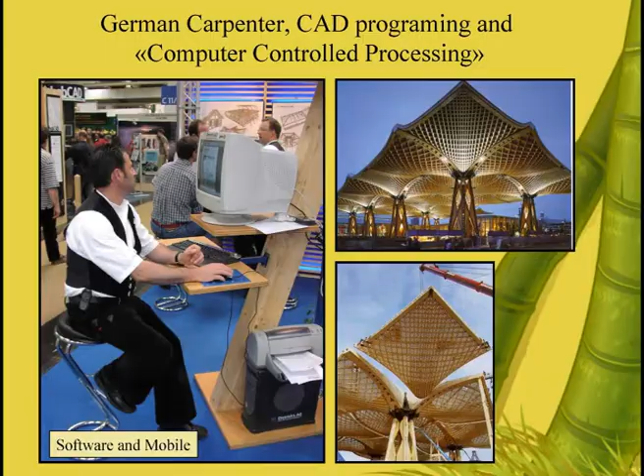So I see you understand English. Okay, so obviously it is good to have practice.

I learned with Simón Vélez, and Simón Vélez in 1999 was building this building - it was a prototype scaled model for the World Exposition in Hanover. So I worked with him. I also did work before, but I learned a lot. For example, this building was tested.

This was engineered and tested in a prototype. They did cables from here to here and from here to here. They put a lot of load, and with the total station they were checking all the deformations, and later they put the AutoCAD design into the computer to calculate with SAP 2000 and to measure all the deformations and get conclusions about the engineering capacity of bamboo.

We know bamboo has a very big tensile strength, similar to steel, but the problem is in the joinery. Later we can talk a little bit about being honest and showing also the bad parts of a construction, because only if we put our fingers in the wounds can we really learn. So making things, building, is a very dangerous job, because you are going into new terrain and you are making errors, or the workers are making errors, and you are responsible - you as an architect, you are responsible. So you have to learn first from the masters and then do your own job, but also be able to check critically what you have done wrong. But at the very end, you must put engineers to do the testing and verify if your SAP 2000 calculations are correct. The problem is not the bamboo, the problem is the joinery.

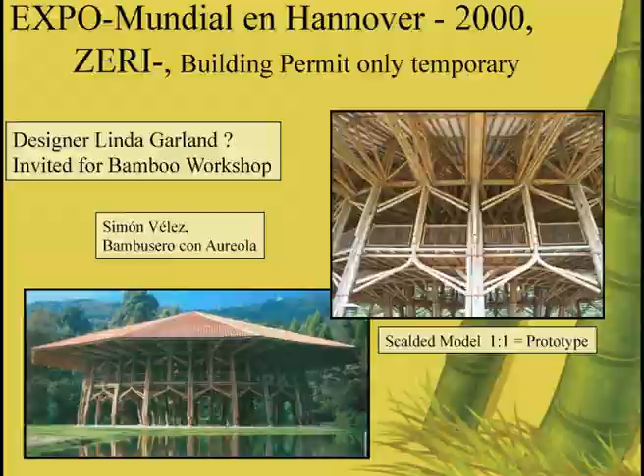Linda Garland, I think, is also very important. I met Andri at Linda Garland's, but I think you gave the introduction already. So in Bali you have now these types of buildings. Actually, I was in 2005 giving a workshop at Linda Garland's place. I think you were there, and also John Hardy was there. He got very fascinated about bamboo. He did some traditional bamboo housing before, but now he started to do these crazy things. And I think nowadays the world is looking to Indonesia and saying, wow, Indonesia is making wonderful bamboo constructions. And if I see your house, yeah, it's true.

Yeah, it's beautiful. You have a big potential. There is a big potential, only maybe 1% of the market. But there is potential for guys like Andrea to go into the world, and for you too, but you have a fixed job. There is potential for all of you if you become a little bit practiced, and also visionary. There will be jobs, hotels, social work is always good for beginning, but you can't survive too much time on social work, yeah? Unless you become a UN consultant or something.

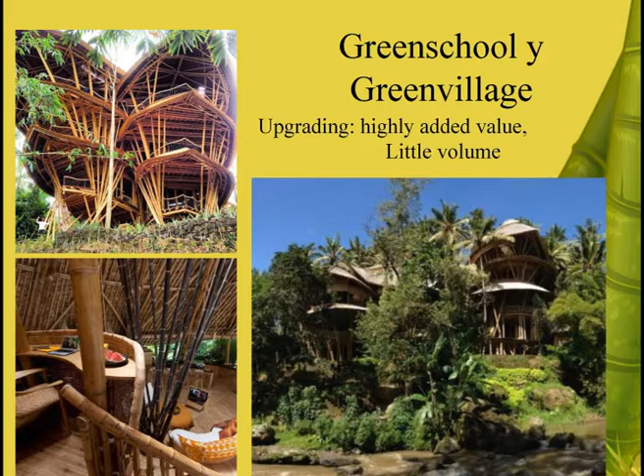That's good. So let's go on.

There is also a second business line, export of poles. Indonesia is exporting a lot of bamboo hitam, a lot of bamboo petung, and also some other species, I don't know. But Christoph Tönges is buying 2 or 3 containers per year from Java. So there are companies in Germany that buy from Vietnam, from China, from Colombia, from Indonesia, from Africa. So inside Germany you can probably buy more species of bamboo, already preserved, dry, cleaned, but you pay $20 a piece.

So I was selling 8,000 bamboo poles, perfectly graded, 12 centimeters on the bottom, 11 centimeters on the top, plus or minus 5 millimeters. I sent 8,000 poles to make this parking lot. This was 12 years ago, and the bamboo is a little bit gray now. Then they ordered new bamboo, and I think they will replace this bamboo, but they made a second parking lot. So in the city of Leipzig there is a 4-story parking lot at the zoo made from Colombian bamboo.

The structure is steel, but that's so the cars don't fall out and the children that walk there don't jump out. We had to cover this. Initially they thought in wood, but as it was the zoo, they thought, okay, if we have the zoo with all these tropical animals, why not making the parking lot also a little bit tropical looking? I saw so much green...

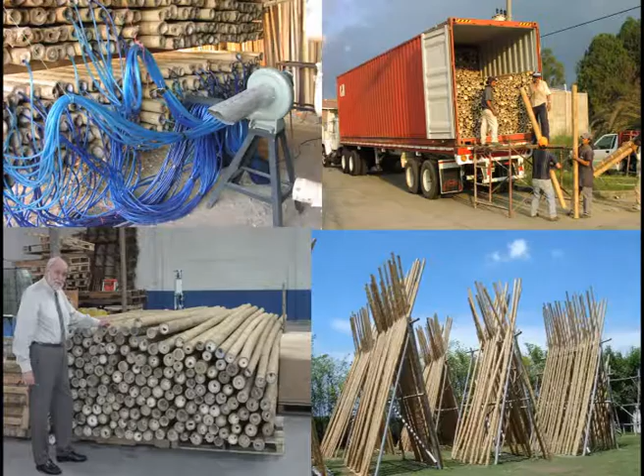The main problem was the selection process and the drying. I had to deliver very fast, and the bamboo was preserved. So you make a hole through it, put it in a tank, and then it comes out with 150% humidity. So you must dry it. The drying was done like this, so it becomes nice and yellow, but after 2 or 3 weeks here you must put it in shadow. Like here it is in shadow, and there's always a stick between each line, so the air is flowing through it. But it was still too slow—even though Colombia is a tropical country, it was hot, but not hot enough.

So I did this invention: I blow air through the hole. The bamboo is actually drying from inside out, crack-free. Because if it dries from the outside, the inside still has water, and the outside is drying, so it cracks. But if you shrink the middle first, the outside will be without crack. So I gave this invention to the world—you can copy it, it's not patented, because I want bamboo to be successful. Anyway, it would have cost $10,000 to make a patent on that, and I don't have it.

But this is the way to do export in bamboo. So there is business, very occasional. The problem is Colombia—$500 a month for one worker is 3 times more expensive than Indonesia. But if you copy this system, Indonesia has a big potential for bamboo export.

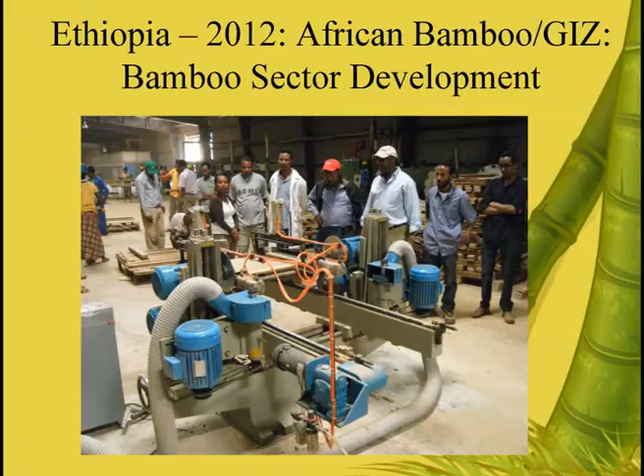Also in Timor-Leste, for example, but not here in Indonesia. So what we are doing is this type of bamboo flooring. We cut, split, and make bamboo flooring. Another type of bamboo flooring is what you have in hand. You crush the bamboo and glue it together so it really looks like wood. There's not much difference between this and the traditional look of wood. The specific density is more or less 1 ton per cubic meter, or between 0.9 and 1.1, depending on the machinery. The trick is to make splits, and each kampong can have a collection center where it is prefabricated in splits.

Then you send it to the factory, like Indo Bamboo or this other factory, Bambulogi. So you can make blocks, and every carpenter, every furniture maker can use this to make furniture. Before, Java was very famous for the teak industry. You made thousands of teak chairs for the whole world. The logistics, the factory, the machinery is all there, but there is no more raw material.

I think this, together with the 1,000 village program like what Arif is promoting now, is the future of Java, and maybe Sumatra and Borneo.

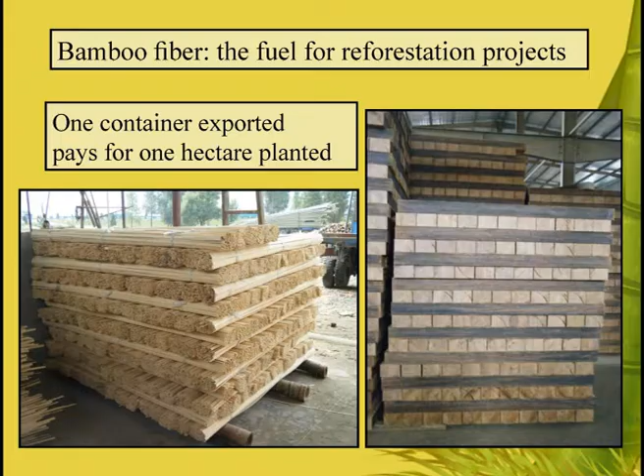But even the bamboo boards I bought from China, the laminated one, the cross-laminated, are 4 centimeter thickness, 240 times 140. It's just $15 to $20 a board from China. Calculate the cubic meter, and the cubic meter is somewhere around $1,000.

But compared to multiplex, or to a good multiplex, it's not that different. But then in Indonesia, the Indonesian produced bamboo boards are very different in terms of price. So why should I take bamboo then? Or how do I produce bamboo?

I've talked to the factories, I tried to understand their way of production, and the thing is, of course the labor is cheaper here than in China, but it's also way less efficient than in China. So you have to work on the efficiency and you have to work on the big scale production, and it will become similar to China here. It's just a process of 10 years.

You just started here. There are only 2 factories who make bamboo laminates here, and they are obviously much more expensive than big scale operations in China. China produces 30,000 square meters a month, one factory, and they have hundreds of factories. So the small factories in China went broke - they cannot compete with the big factories anymore.

So there is a price fighting worldwide, and I think your error is that you are targeting cheap. You should target the high-end market. You cannot compete plywood with beautiful bamboo - normal ugly standard plywood is maybe $500 per cubic meter. You cannot compare that with high density, high value, beautiful, clean surfaces like produced by bamboo laminate.

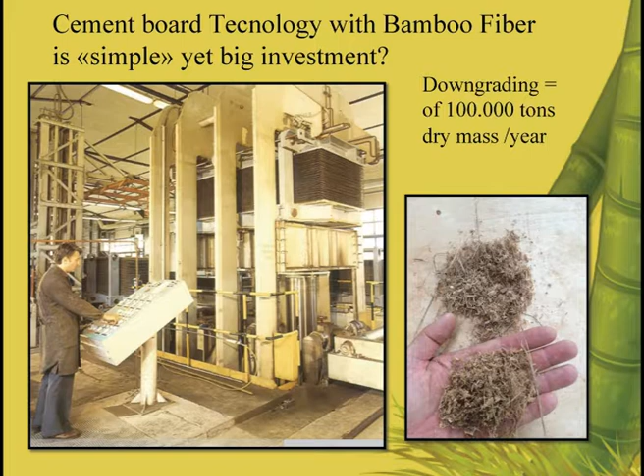But you are more architects, you are not into industry at this point. I just give you the vision. So there is one thing, can you go on? In architecture, if you build houses, like traditional houses, then you are also...

Having high added value, because the perfect bamboo pole gives very high added value in very short time. With 100 poles you can make a 100 square meter house very fast. But the 100 poles must be perfectly treated, perfectly straight. So maybe for 100 perfect poles you have 900 not perfect poles. So 900 poles go into industry and 100 poles go into architecture.

So I see that architecture is the flagship for bamboo development, but the real money is not in architecture - it's in the big scale operation of industrial uses.

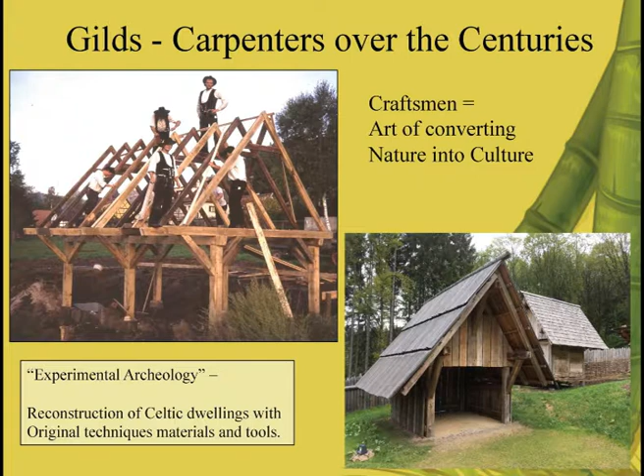Engineering came with Gustave Eiffel when he built the Eiffel Tower. He used French carpenters to build the shape, to give him an idea about how to structure the Eiffel Tower. So before Gustave Eiffel, there were carpenters who were able to build 117-meter bridges over the Rhine.

And the guy who did this, Johan Grubenmann, he did not know how to read, he did not know how to write, but he knew mathematics and he knew he had a good crew of carpenters.

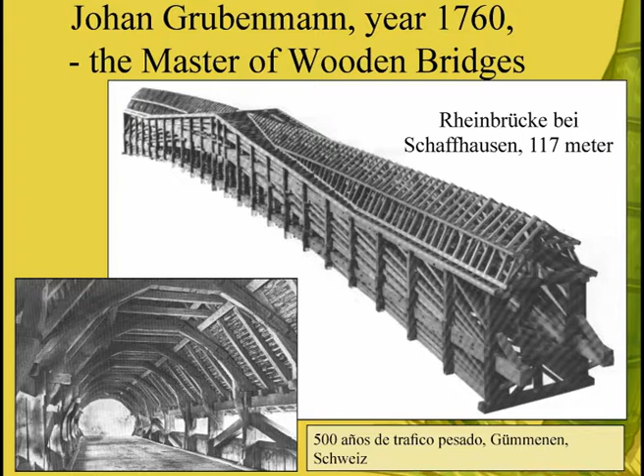And the span, like here, two big carts of horses, carreta, can go through here, very heavy, 50 tons each. So the old school is very important.

So what I do is transfer old wooden bridges into bamboo bridges. My specialty is not inventing bamboo or designing with bamboo. My specialty is the joinery.

All these little joints are very well thought through, because in Germany, the carpenter is not a designer. The carpenter is only responsible for the joinery, for the traditional execution of the joinery. That's our strength. The engineer designs, the architect designs, the engineer does the calculation, and they give us the responsibility for the perfect execution. This is something that has to be developed in Indonesia.

You have to work together with the technical schools. University is one thing, engineering is another thing, and you have to have the carpenters trained. Otherwise you will have the same problems that Andrea was expecting, like this hook joint. It's bullshit. You can use it for furniture, but you cannot use it for structures.

But you have to have the experience. So now he has the experience, and later he will do better. So we did this training.

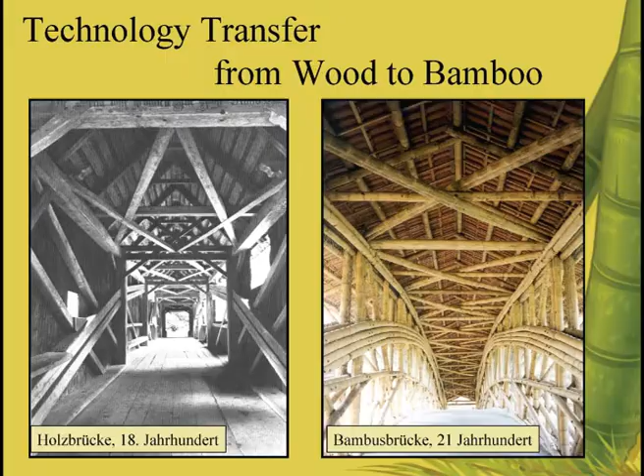We did a 40-meter bridge. This was the bridge that was the inspiration for you. This is the 40-meter bridge at the University of Pereira. Our goal was to train the local carpenters, the architects, and the engineers.

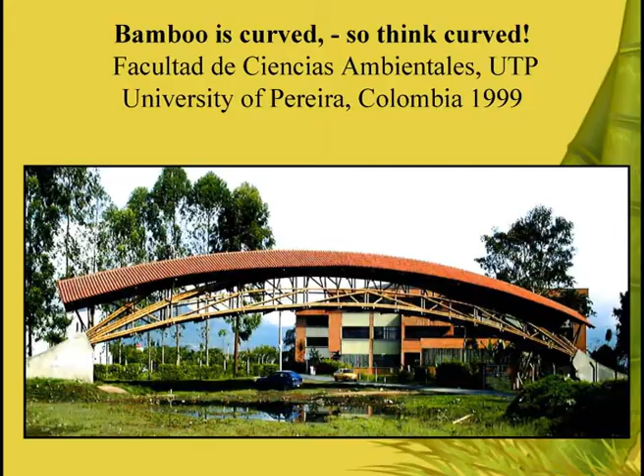But mainly to get the combination, so architects, engineers, and carpenters speak the same language. It's very important to get this working together, like a clock. So it was actually very easy. Within 5 years, I developed a whole system.

This is a 5-meter module. Here you see it's only one cross, here it's double, and here it's even triple. So I developed a modular system of designing bridges from 10 meters to 20 to 30 meters. What I could not achieve is to train the Colombians to use the bridge properly.

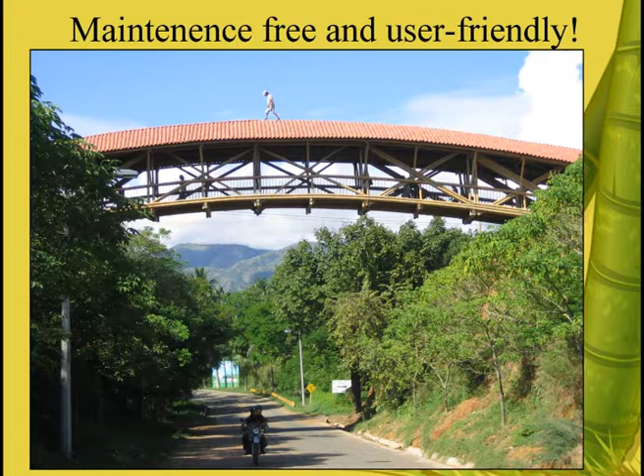So you see, here is a special joinery. I think this little thing, you should study much more. There is a lot going on. For example, this piece is not slipping on top, there is actually a cut here, and it hooks into this.

And there is cement here, here, here, here, here, here, here, here. Every little joint has a cement injection. Every joint with a 12-millimeter screw has more or less 2 tons of resistance.

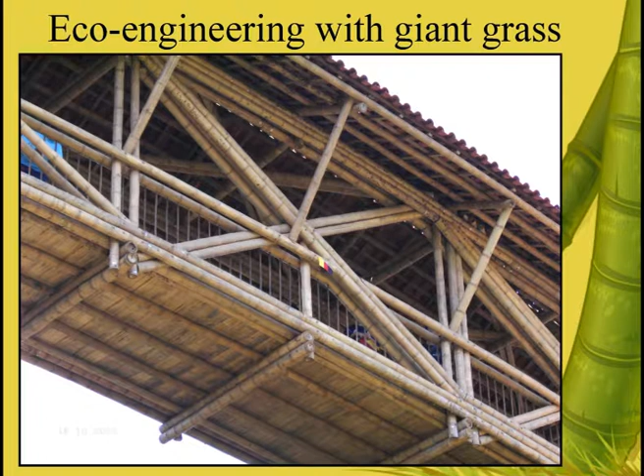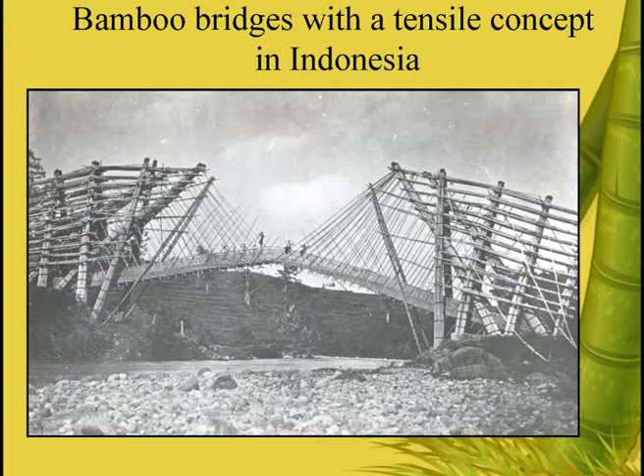So pick up at that point. This is another bridge. It was inspired by a footbridge in Germany. Professor Zengler, who was the most famous German bridge builder, wooden bridge builder, made this triangular concept.

He put the trusses not squared, but together in the middle, creating a triangular cross-section of the bridge. Very clever. This guy recently made an 80-meter bridge in wood, and I admire him, and I learned from him to think outside the box.

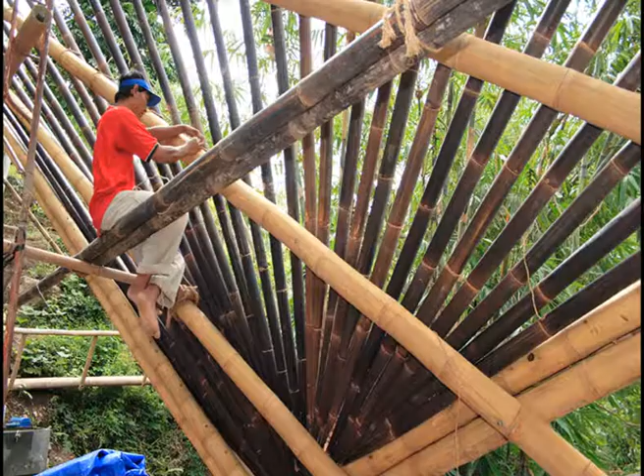So here we have tensile elements. I use the beton for the tensile elements and the hitam for the cross bracing, for the cross section. So the outside is compression, the inside is tension.

And here you can see the joinery. The beton has very short nodes on the bottom, so you can always play with the beton to get the right distance, and on the top you just leave it a little bit longer. This is a load test, but the carpenters had no problem, because they built the bridge themselves. They had full confidence. The next photo was much scarier.

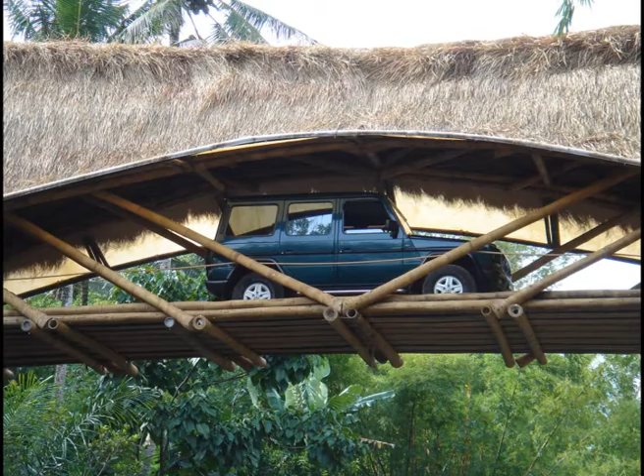This car is John Hardy's $80,000 Mercedes. When I asked him for the keys, he was sweating.

You drive this car? Yeah, I drive it because I have confidence in the bridge, because the tourists weigh much more than this car. Car is not a problem.

This is the problem with the bridges. It's not possible to make a little sign saying maximum 12 people. The moment it starts raining, nobody sees the sign. They just all walk on the bridge and they go for a bath.

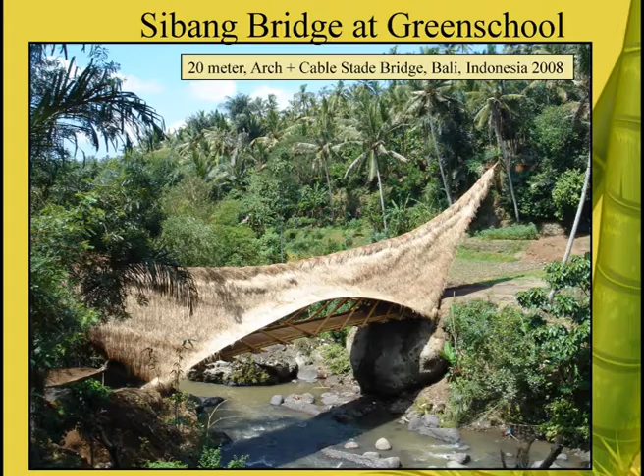This was the first bridge. Later they did a second one - it was not the original one anymore. Then John Hardy donated a house, and this house is standing on 4 points. The entire house is a little bit like Toraja, but has the idea of leaving the air out. It's like a bridge, standing only on 4 points. So this is for the architects, just to inspire you that bridge is not everything, but you can also jump from one theme to another and use structural concepts.

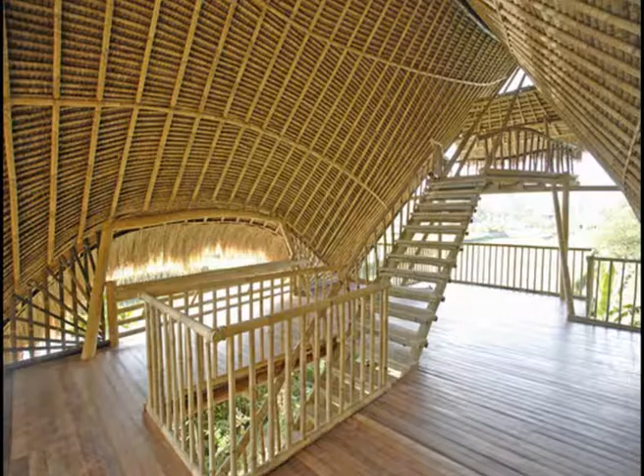Like you see here, I use the stair. The stair comes all the way down to the foundation. The stair starts somewhere here and goes to this part of the foundation. So the very big cantilever of this roof is tensioned by the stair - it's a little bit like a music instrument. Now there is a certain tension, inside tension, on the bamboo.

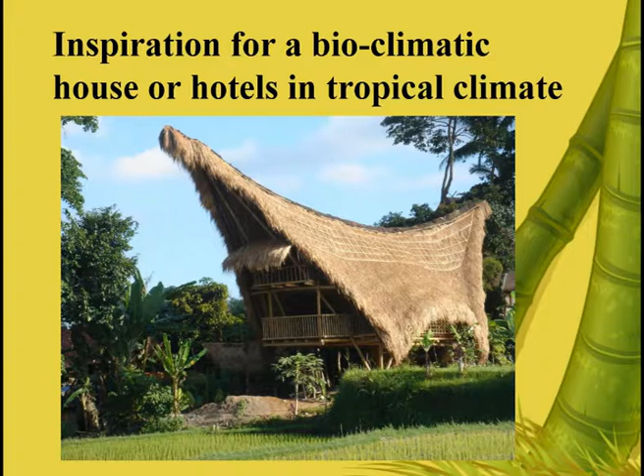Okay, go on - also the curve and everything. Everybody, every foreigner loved this, but the Balinese, they hate it. Balinese need squared houses. Maybe in Toraja you can make such a house, but you cannot make such a house for Balinese - it's against their world perception. It's just not possible. So I don't know if they still use it or if it's a museum now, but they didn't like the house. Anyway, sorry.

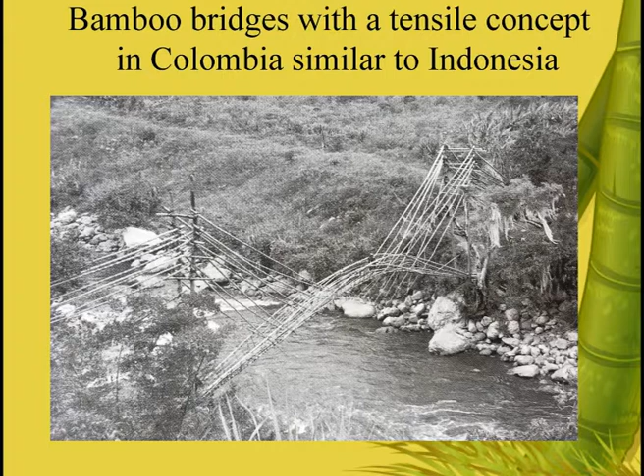What is funny, Indonesia must have some kind of cultural heritage together with South America. How can it be that this bridge in Colombia has the same concept of tensile elements? It's very interesting that Indonesian houses, like the Toraja house, also existed in Ecuador. It's very interesting that this type of bridge is almost the same as the Indonesian bridge we saw from West Java. So I don't know, maybe something is there that we still have to investigate.

What you have to do is select the curved bamboo. When you buy it from farmers in the field, the bamboo is like this, so you have to pay the farmer extra money to bring the very crooked ones for shipment. Normally they cut the crooked ones into short pieces because there are many crooked bamboos, but you have to pay extra to get the very curved ones, and then you can make very good bridges. They are there, but the farmers cut them in pieces.

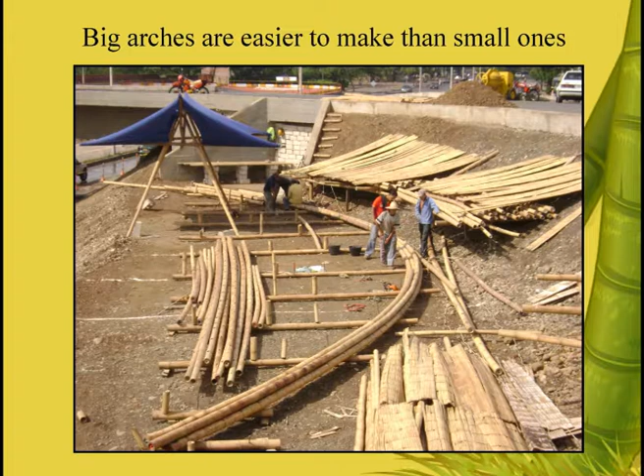And it's a system, it's what carpenters do. Carpenters put something on the ground, take the plan, put it on the ground, and work on the ground first, and later it is erected again. This is the trick to do big structures, at least it's my way.

Sometimes we can press a little bit, and then I put bamboo pins, every 50 centimeters, to combine them. Let's say in this case you have 3 bamboos, and I put bamboo pins here, here, here, here, and here. Sometimes we use a steel rod, for example when the bamboo is not voluntarily staying down - if it's a little bit up and doesn't really want to come down. I use bamboo pins for 80-90% of it, but here and here you can see I also have a steel rod every 1 meter or so.

What is the size of the bamboo pin? 12 millimeters, that's all - bamboo pins. I make them myself, dowels. I have a dowel machine, and all the bamboo that is not usable for long elements, I cut into 1 meter 20 pieces and make dowels.

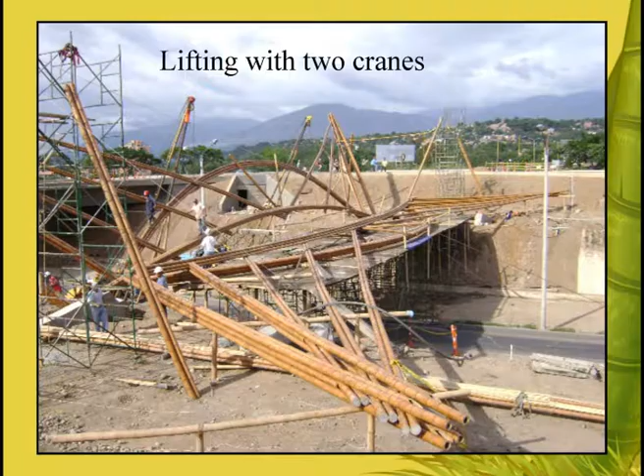So you see the whole bridge is pre-assembled on the ground. That is very typical German, French, or Swedish way of building houses. We do everything on the ground, and then with scaffolding or maybe a little car crane, we just bring it up. This you can only do with bamboo - you could not do this with wood structures. Wood is too heavy, but bamboo is light, it's a lightweight construction.

So the concept of construction is build on the ground and then use a crane or labor force like you did with your 100 Filipinos - you just put it there. But these are old techniques, ancient techniques, and they need community sense. You need somebody who gives the command, or sometimes singing - they sing when they do community force, you have a rhythm, and with the rhythm you can very good coordinate the force.

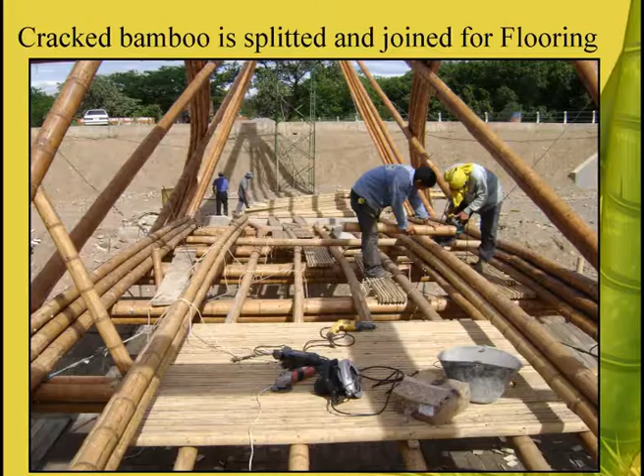Next. You see? Next. Next. There's so much to explain, yeah?

There's so much to explain, but you see here, I limited the width. The width of the road is only 3 meters, because if I made it 6 meters, like now in Medan where we are doing a 6 meter wide road, then I have the danger of having 1,000 people on the bridge. If I limit the road, I have only 500 people. But the architect in Medan is a little bit stubborn - I told him, but he wants to have a disaster, so I don't know.

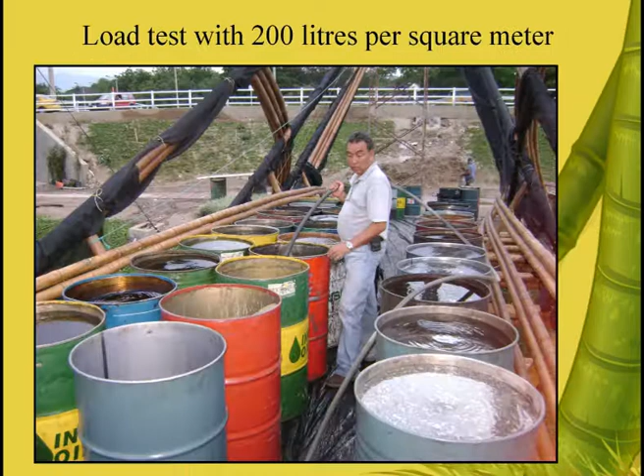Load test, finished bridge, you see the anchoring. Here is the tensile concept - this is converted into compression, that's why they are very strong. And here we have the...

I'm curious, how do you erect the curve when the road is still normally used by cars? How do I erect - select the curve, it's already selected. When the bamboo comes in, I have a truck with 200 bamboo - 20 are very curved, 20 are a little bit curved, and 30 are straight. Do you put them all on the road? So do you stop the road operationally?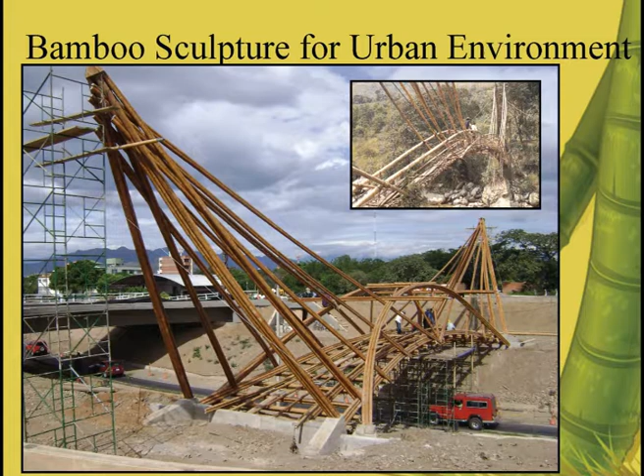You see here is a scaffolding, and the road is free. You see there is a bridge, we call it a false bridge, and there is scaffolding under the bridge, but the road actually goes through here.

But in Colombia we have a little bit of a problem which you don't have here in Indonesia. Colombians like to drink whiskey, and especially in this city we had an accident because some drunken drivers jammed into the scaffolding and damaged it. The car, I don't care, but it was strong - even though he took out the whole line of scaffolding, it was still strong. So the scaffolding was not on the street, but he was kind of close.

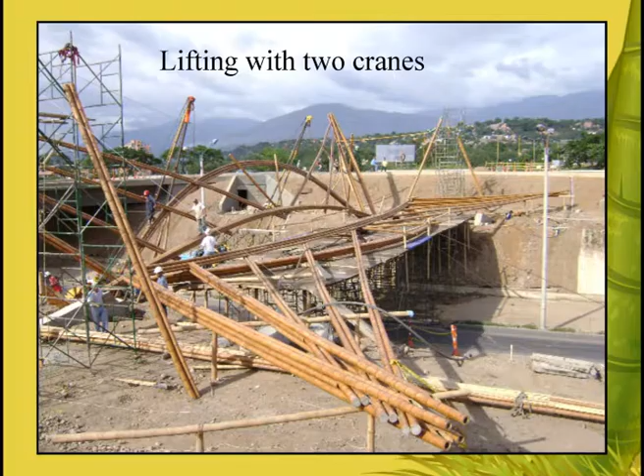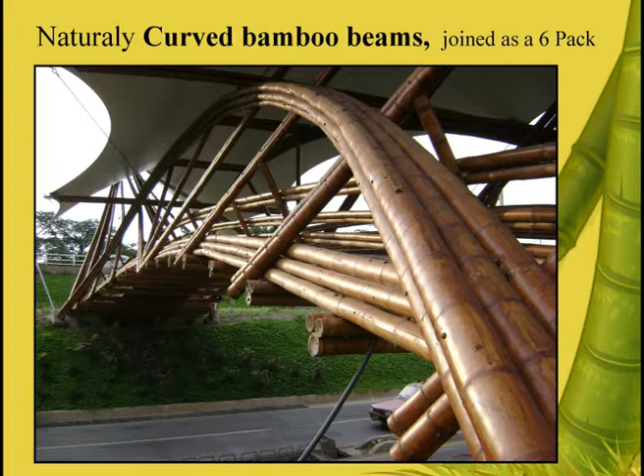I wonder about the durability of this bamboo, since it's not really covered. Well, it's now 10 years, so you see some cracks here. The cracks are basically from non-mature bamboo, especially petung. If petung is only 2 or 3 years old, you have lots of cracks. If it's 5 or 6 years, you have little cracking. Same with guadua, but the problem is the delivery is always late. The bamboo comes always green, and you don't really have 100% selection, so sometimes a little bit of unmature bamboo goes into the structure.

But you have big packages here. We have a 3 meter span from here to here with the roof. So it's more or less 3 meters here, and the bridge is wider, but you can also see the roof is wider, so we have sun coming in, which is actually causing the cracking.

But then I have a very good coating, it's like Livos deck oil. It's very good coating, we also used it in Phuket, Thailand. Is it available here in Indonesia? There's a distributor in Bangkok, he sends also to Jakarta. It's called Livos Alice deck oil. It's very good, but I think you also have local products here that are good enough. Anyway, it's just a question of coating.

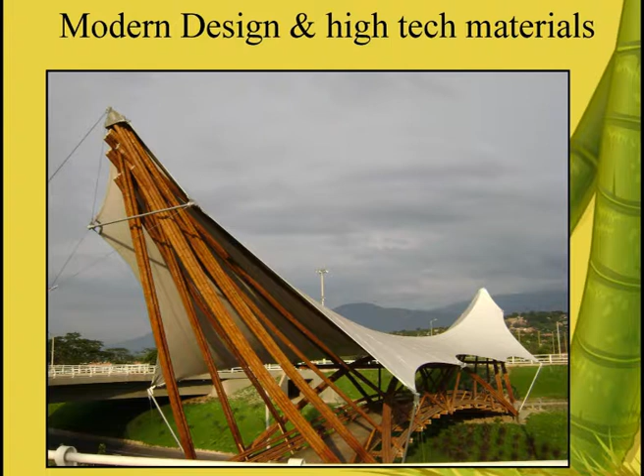So here you see the sun is now coming from the side, and I put these two additional points; normally it would go like this, but then I would not have enough shadow. So I introduced 2 extra points, and this roof shape is actually inspired by Indonesia, because before coming to Indonesia all my bridges were straight and squared. I learned in Bali, like also the Batak houses and the Minang houses, they have this shape so the hot air inside is always going out.

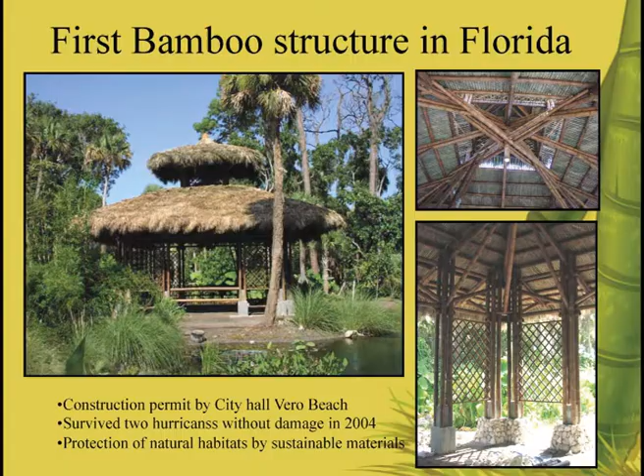This is another development. Bamboo is very straight, sometimes a little bit crooked, but not really curved. At John Hardy, we played around because he's a jewelry designer, so he wants to make everything curved. It's not possible, or do I have a limitation in my brain? One day I was seeing a whole pile of bamboo, because we always work with the bottom part, we never work with the top part, but the providers were also sending the top part, the tip, the ujung, and it was always piled up there. So how can I use this?

So then I came across a book about Japanese architecture and gardening, and they have something they call tamabuchi, which is like a broom, like a lidi. So we cut all the bamboo into 1 centimeter pencil-size sticks, and join them together with bamboo, with tali. And then you can actually bend it, you can see here, it's all bent.

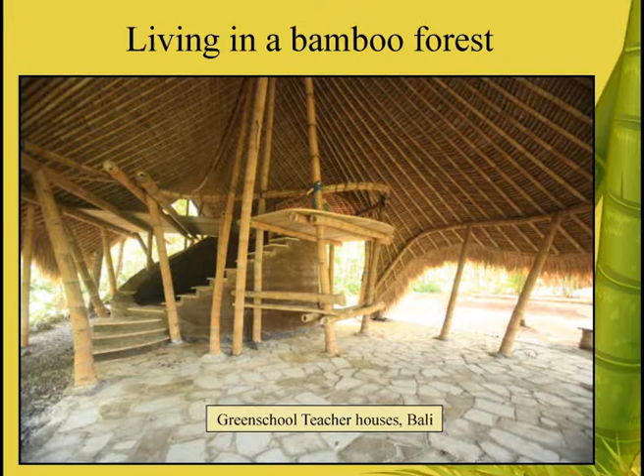So this rope you can buy, and then first I press the lidi really strong with the rope. I twist it, I pressed it. Then I put the tali around with a little bit of lem, a little bit of glue. You press it around, and then you release the Spanish wrench, and then you have the system.

You construct it on site or on the ground? We prefabricate in the factory, and then 20 people walk it to the site. How do you... no, you can form it in the place. First you make one straight lidi, and then you just twist it. It's very creative, actually, it's very interesting. They use it a lot in green school, it's one of their biggest secrets. But it's very easy, you just have to try.

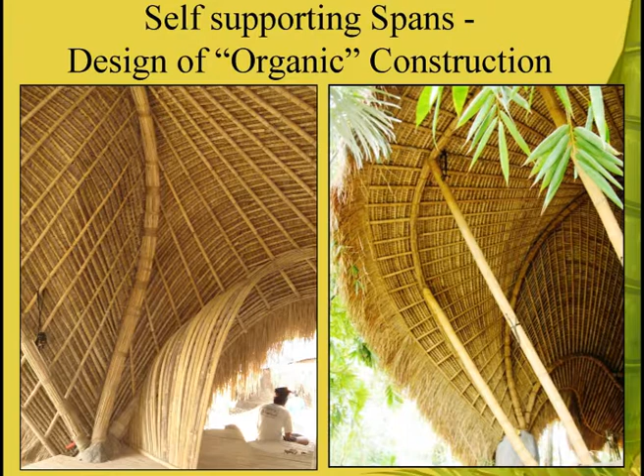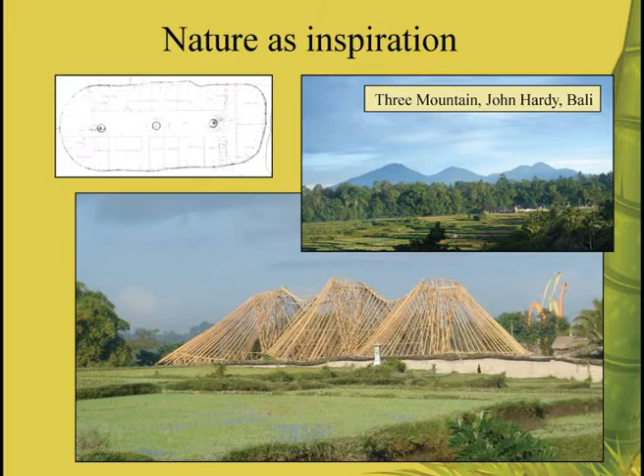Okay, this was the three, Agung, Batur, and I don't know the other one, I forgot. So the three mountains of Bali, the three volcanoes of Bali, they became the three mountains, and I think to relax a little bit, you tell the story about Tiga Gunung.

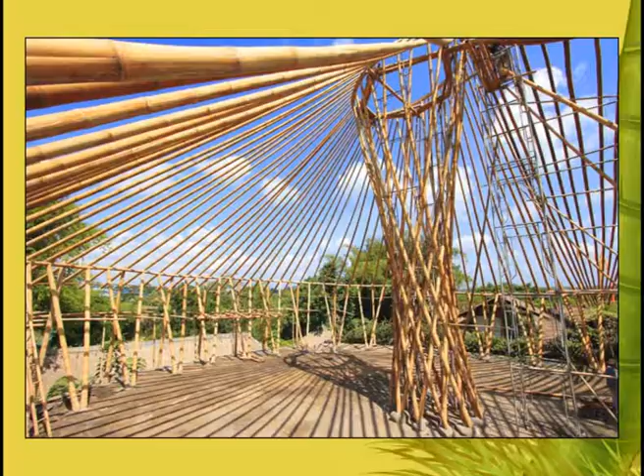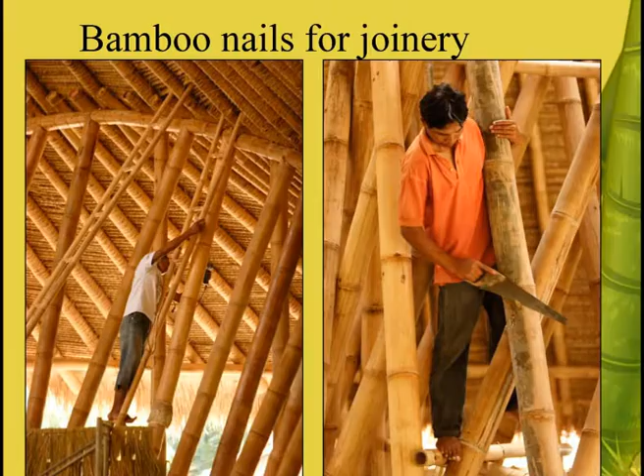So it was a football field, like 50 by 25 meters, or sometimes 27, with 3 towers, and I copied the concept of the volcano. So inside, go on, one more, inside you have this tower. So I have a ring formation on top, a strong ring, laminated bamboo ring, and on the bottom I have another ring, and I have these V-shape version.

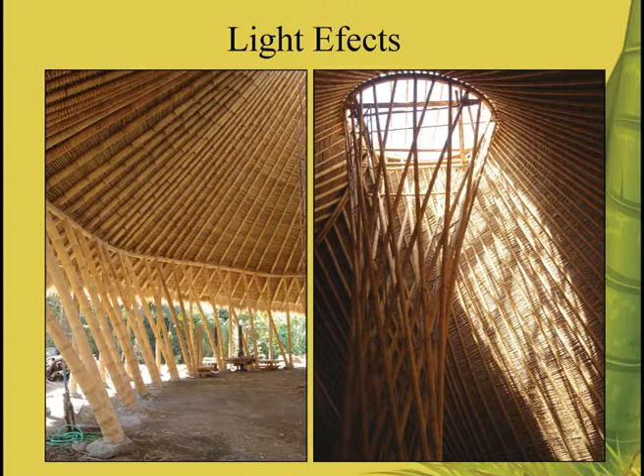And I have tensile elements that go vertically. So one outer ring, one inner ring. This is compression, this is counterweight, and then we go on. Then we put the rafter from the top ring to the bottom ring. And I think now you can explain your...

Because this is the first building that has been recycled. After 7 years they needed a new roof, but the world economy was not so good, so they decided to sell the whole building, and the whole building was transferred to Turtle Island. So the whole tower was calculated for 40 tons of weight, because if the alang-alang is getting wet, it will have 40 tons on each tower. Nevertheless, we never had a problem with this system. So it's very strong, very interesting. Because nobody sees, you cannot see - if you have more, everybody says engineered structure, very clever, yeah? But now people come there and they don't see actually how this thing is working.

What's your reason to use the bamboo instead of steel rods? Sometimes if I know where the force is acting and I know there is a lot of force, I still use steel rods in the same system, and cut here because it cannot come out. But if the force is only around 300 kilo, I can use bamboo, I don't need to use steel. But if the force is like 2,000 kilo, then I have to use steel.

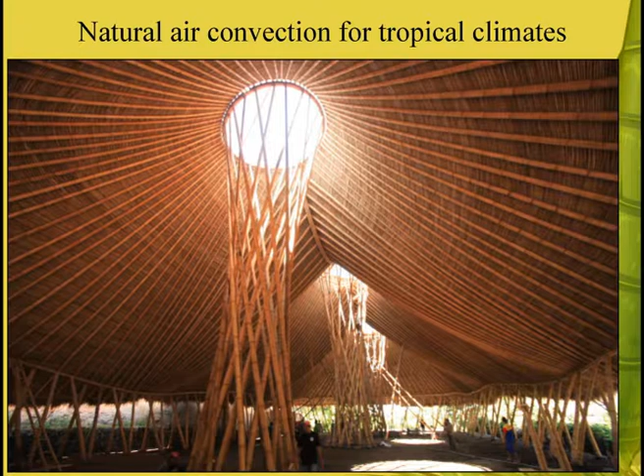At the same time, when the roof comes down, it moves a little bit like this, so the span expanded like 3 or 4 centimeters. These measurements were taken and then brought to Germany.

When they came to Germany, they noticed their software didn't have enough capacity to calculate all those elements, because there were like 500 elements, meaning probably 1,000 joints. So they didn't have the software to calculate it, and it took about a year until they got financing for new software. They bought the most modern software, put the whole building into it, and calculated the stresses at each point.

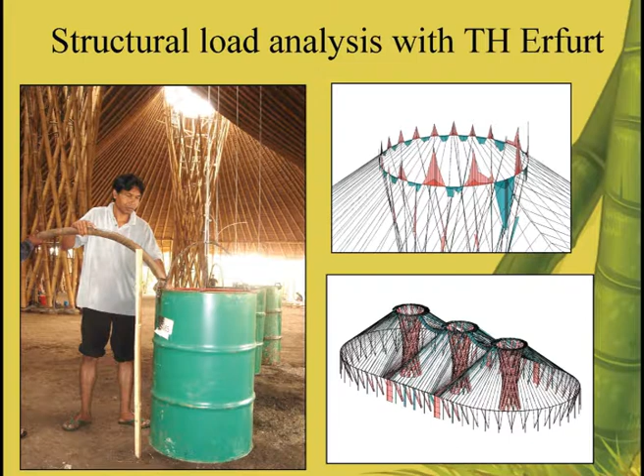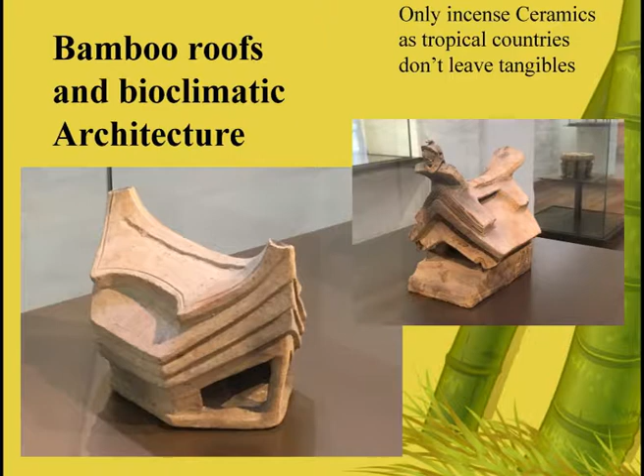I think this is very similar to Batak or Karo, and also very similar to Toraja. So maybe there is some connection between Indonesia and Ecuador. But no - I was building a house there with the same system, prefabricating big A-frames, and we used the bamboo as scaffolding.

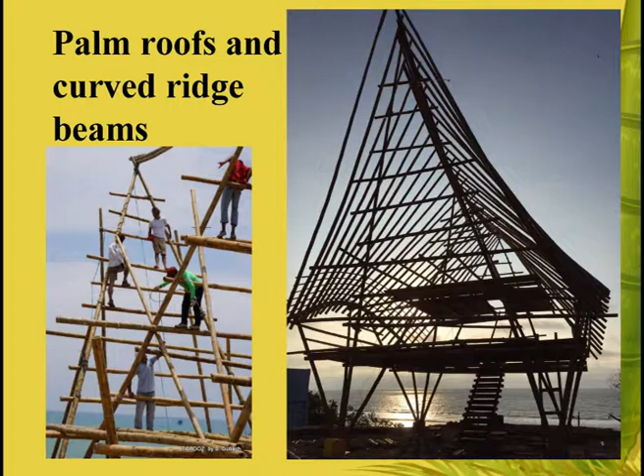Later, when you finish the house, you take the horizontal beams out. But the house is standing on four concrete pillars.

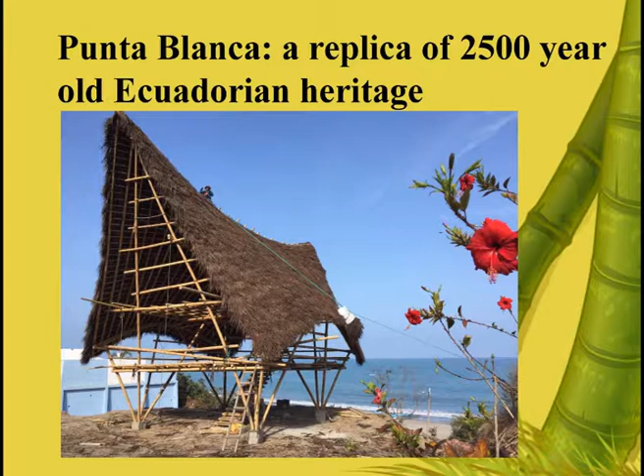My proposal was this should be the architecture for the tourism industry, because this is ethnic identification with cultures that have been in Ecuador 2,500 years ago. They have bioclimatic aspects, cultural aspects, natural materials. For me as a tourist, I would go here - I would not go to a standard square box, 7-story tourist hotel.

So my proposal after the earthquake, we just did this. We trained the personnel, we trained the local carpenters, but we also gave them a new idea about their own culture - it was completely forgotten, nobody knew about it.

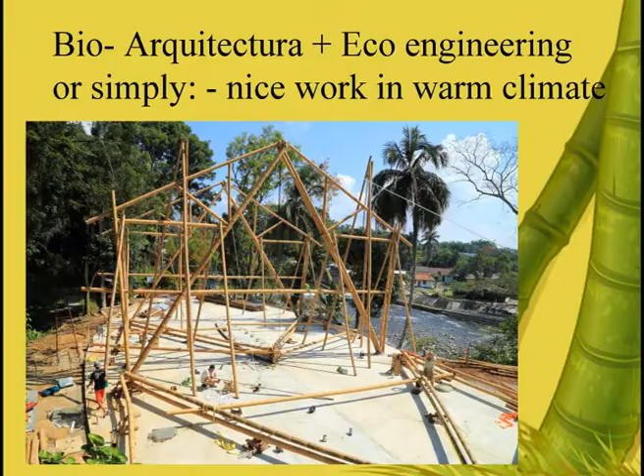Very similar, this is Sumatra - relatively traditional carpentry, done in bamboo and concrete, 12 meters, 2-story building. It's all prefabricated on the ground, so the whole truss is completely screwed together on the ground, and then raised up.